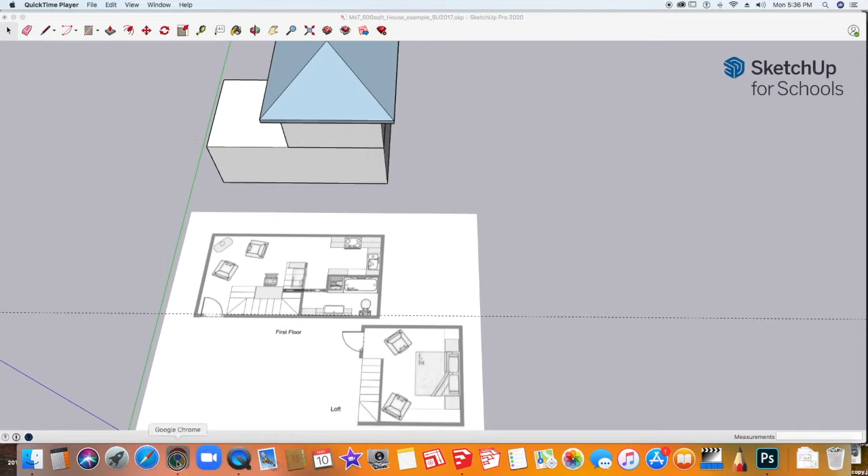So I want to show you quickly what you have to do. Go and download your floor plan. This is my floor plan here. You can see the windows and so forth.

What I need to do is rescale it. However, if I rescale it in this file, I will rescale everything else in the file, and I don't want to do that. So I'm going to start a new file.

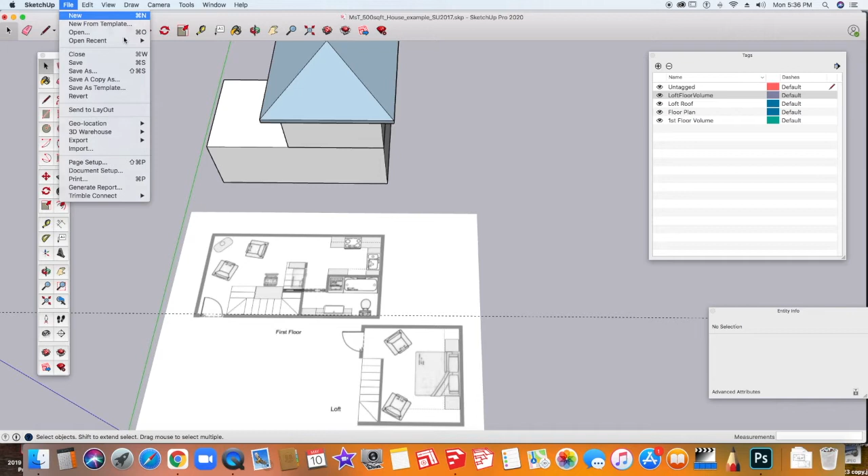I'm going to import, just like I did before, the new floor plan. There it is. I'm going to say use as image. I'm just going to click here and start to pull away and click again.

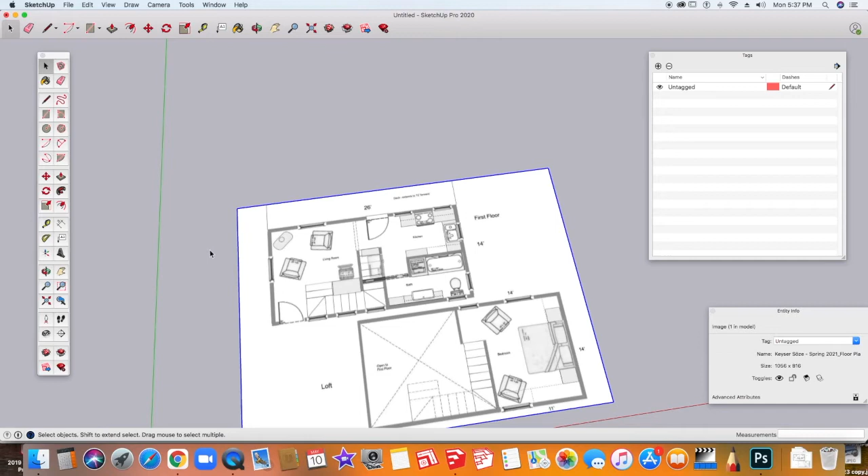Now I'm going to do the same thing as before, but notice it's in a new file, so it's not going to affect anything. One of my sections is 14 feet, so I'm going to grab the tape measure tool, zoom into the corner, go to approximately where that corner meets. Make sure it's anchoring on the green axis or the red axis.

It depends on the orientation of your file. Click again, and I'm letting go of everything, and I'm going to type in 14 feet, which is the length of that. Then I'm going to get the box that says, are you sure you want to resize this? And I'm going to say yes.

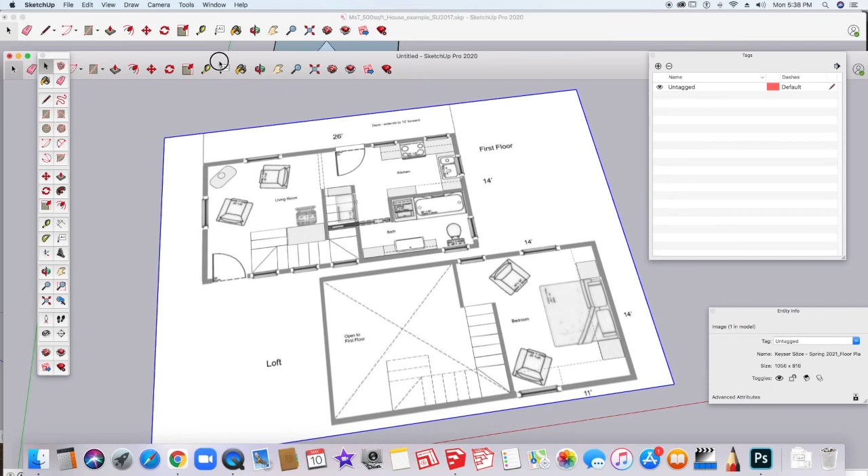And now I have a resized image, and I'm going to quickly do just a little check here. It's pretty good. So now all I have to do is select this, go up to edit, copy, then go to my old file and bring it in here by saying edit, paste, and here it is.

So I'm just going to put that in here now, and I'm just going to drop it here to start, and then I'm going to delete this old one, and then I'll start building my floor plan and adding my walls and my windows to this plan.